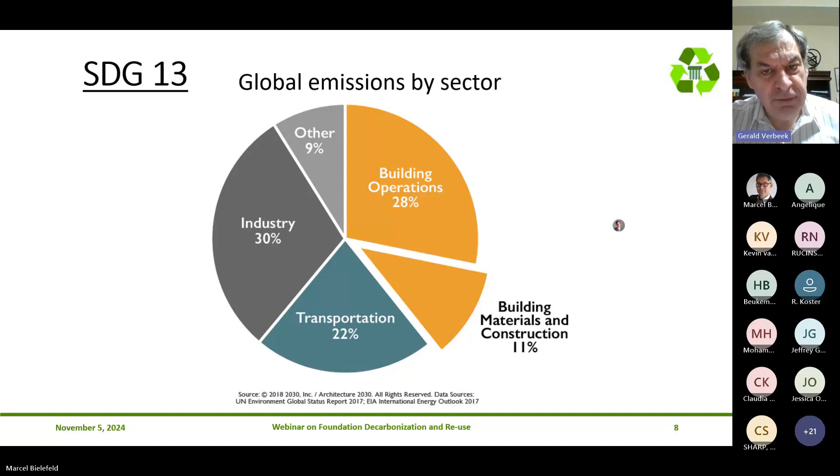But you can go one step further. When you look at just three materials - concrete, steel, and aluminum - they're responsible for about 23% of total global emissions. Those are the materials we're using, especially concrete and steel, in our foundation industry. So if we can reduce the amount of concrete and steel that we're putting into the ground, we are reducing those emissions, and it will have a major effect.

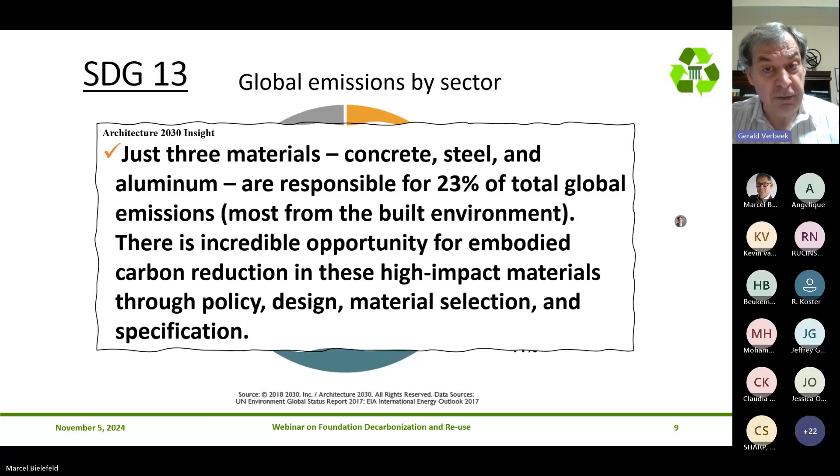And that is where this pyramid comes in. It shows at the top that ideally, to completely reduce emissions, you build nothing, but that's not really a realistic option. The least you can do, shown at the bottom, is minimize waste, because that at least reduces total emissions. But most of the time, what people think about when reducing emissions is building clever or building efficiently. Build efficiently means minimizing design loads or performing more testing so you can use higher resistance factors and reduce the size of your foundation.

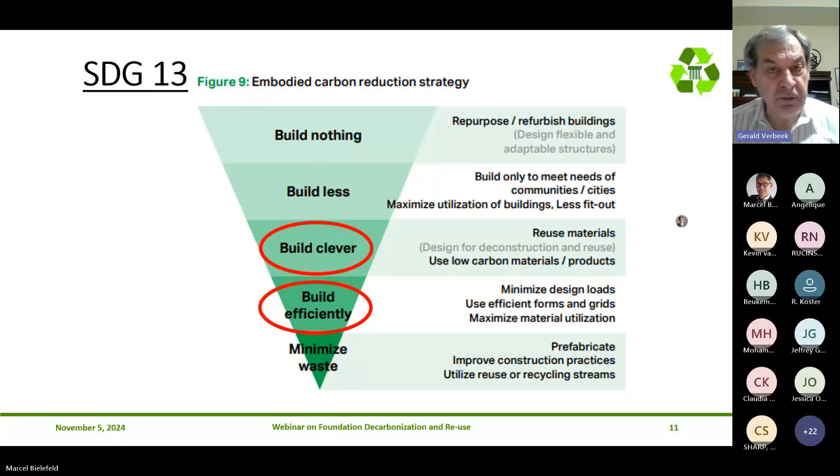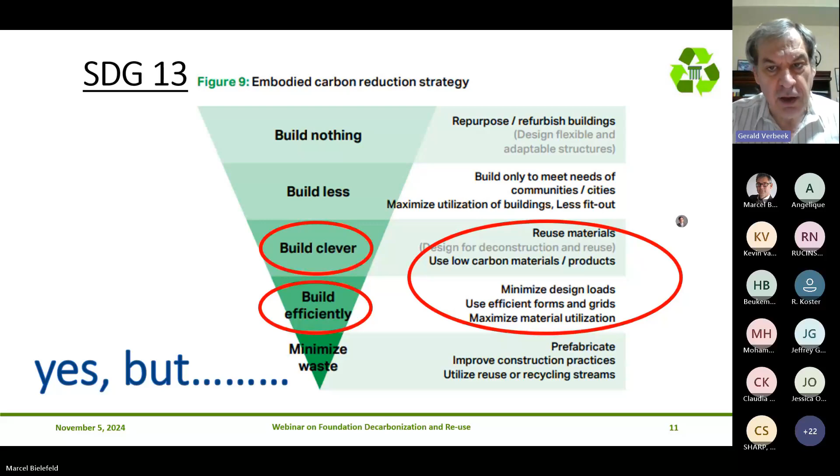Build clever means reusing materials, reusing aggregate for instance, or when putting a steel foundation in the ground, recycling steel. Those options are there, but there is another option that, in my opinion and in the opinion of the conference organizers, is not addressed often enough - and that has to do with foundation reuse. That's why back in 2023, and again this year and next year, we will continue with a conference to really focus on foundation reuse.

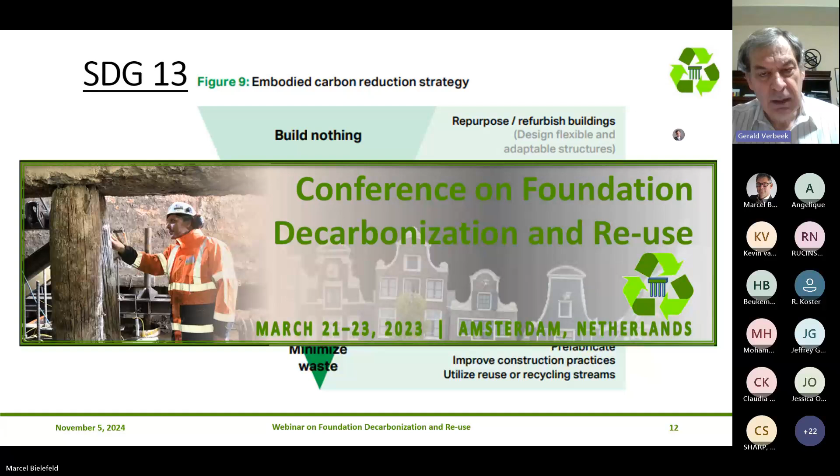The issue is that when you look at the parties involved in a foundation design, there's reluctance, a hesitancy to start talking about foundation reuse. For the geotechnical engineer, foundation reuse may require him to assess the condition and capacity of an existing foundation, something he has not designed, something he was not involved with putting into the ground.

Therefore there are definitely risks involved. For the structural engineer, it means he has to change his design, modify it based on a foundation that is there but not necessarily laid out exactly the way he or she would like. So again, not an ideal solution. The architect has the same situation. He is now bound to put together a design constrained by the existing foundations, something that may not allow for the most optimal solution he or she has in mind.

For the owner, it is very tempting to go with an existing foundation because it may save quite a bit of money, but at the same time you will have to work with a project team where most people are not very happy to go that route. And finally, the regulatory body or building authority, the people that have to approve and certify the design, have to deal with a solution that hasn't been applied all that often, and therefore there are again additional risks involved.

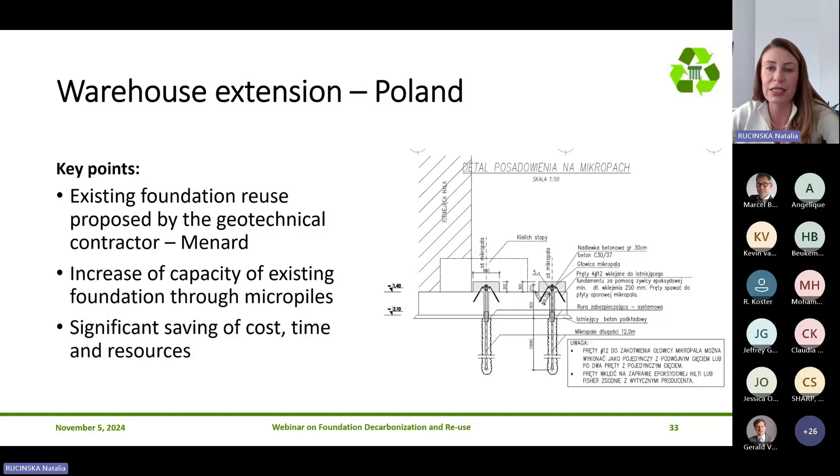That's a nice example of a small scale project, especially compared with the next one, which is a very large scale project with an interesting foundation reuse as well - the FEDRE project in France, a large wind farm development.

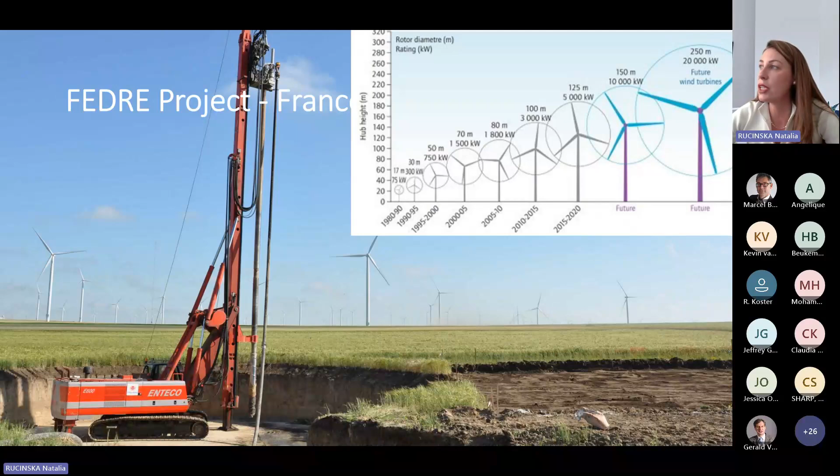If we look at the wind farm industry, it's quite interesting because wind turbines are growing in size. In the 1990s they were 30 meters high; today we're between 125 and 150 meters high, and those turbines are being replaced.

When they're replaced from the previous generation to the current one, the traditional approach is to demolish the massive foundation - generating about 900 tons of concrete waste - and put a completely new foundation under the new wind turbine. The proposal of this project, where Menard is also involved, is to strengthen instead of demolish the existing foundation, to allow the new generation wind turbine to be built directly on it.

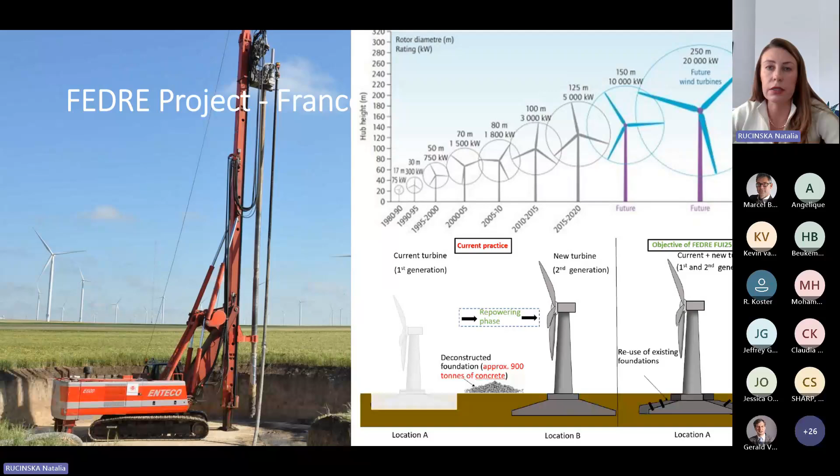A very challenging project - this approach of reusing or modifying the old foundation generates cost savings and is also good for the environment. It's quite challenging because it's a complex design case involving many different parties to make sure it's successful.

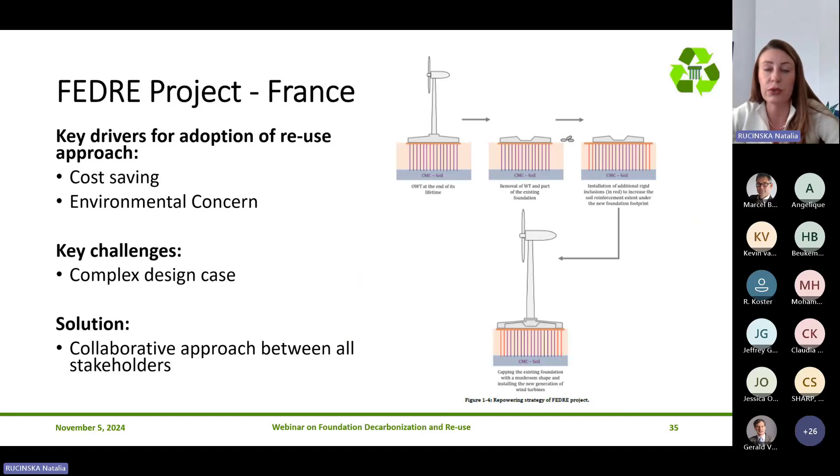Research institutes, contractors, insurance companies - everybody has to work together. I think it's important to mention that a collaborative approach between all stakeholders is generally what you need to have a successful project considering reuse.

Right, so very quickly wrapping up, looking further - what can we do to be more efficient? The definition of insanity is doing the same thing over and over again but expecting different results. Today we have concerns about reusing foundations.

How can we build so that future generations can go back to the construction we're putting in place today, and efficiently use the information and resources we provide them to reuse in the future? That's a different angle to look at it - how can what we create today be reusable in some years' time?

And where can we start? Is industry and infrastructure a better choice than commercial and residential? Probably - it's a little bit easier, more repetitive, lower loads, and less risky constructions.

Looking further from the stakeholders' point of view, what should we do to be more efficient? Authorities could set policies for future reuse aspects. Owners could think of building components as assets.

This, I think, is quite interesting - I'm an owner of land which already has some foundations in the ground. Can I make my land more attractive price-wise because it's already reinforced for future construction? Maybe that's the way we should be thinking about this aspect as well.

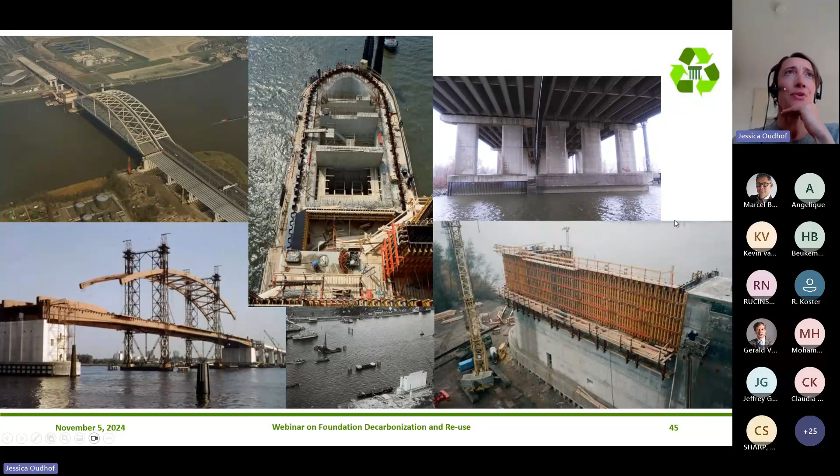But with the widening of the bridge, they took quite a bold approach in the foundation. Here we see a long section of the bridge, so the main arches, the North Pier and the South Pier supporting the arch, and there's also a bascule pier.

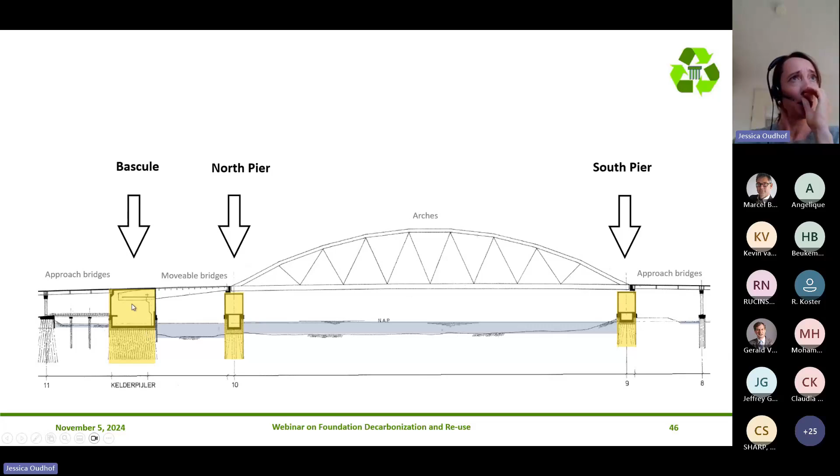But in the 80s, when they wanted to widen the bridge, here we can see the foundation. The green foundation is the old bridge. It's based on a caisson foundation. It's quite deep. It was built in the mid 60s. And then when they wanted to widen the bridge...

But because space was limited, they in the end decided to put the new West Bridge, that you see on the left, with one side on the caisson that was already there and with the other side on a new pile foundation. So they added some parts to the old caisson foundation, that's the pink parts, one to support the new arch and another to ballast the loads so the center of gravity wouldn't change too much. And then they constructed the pier on the other side on piles.

So in the cross section, the arch has 2 different foundations, and they are not connected. So of course the slab, the superstructure, is connected, but the substructure is not. There's a small dilation in between the two.

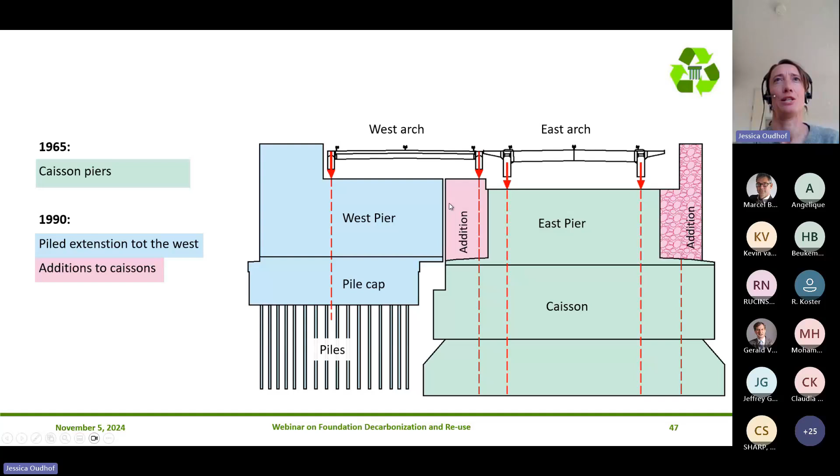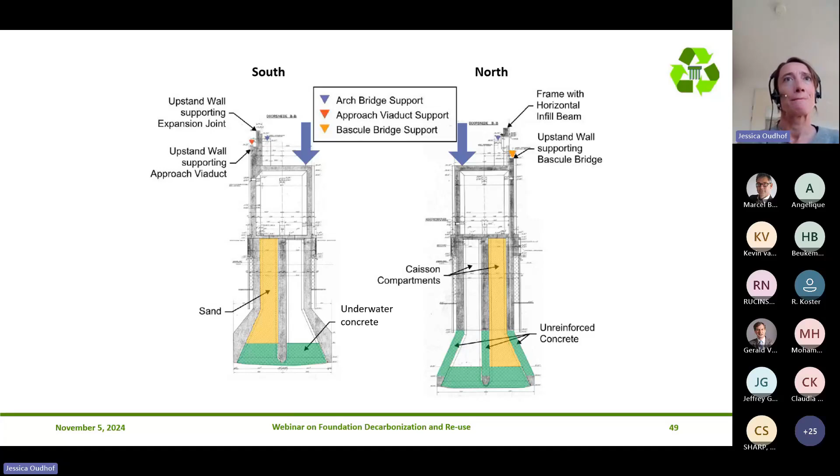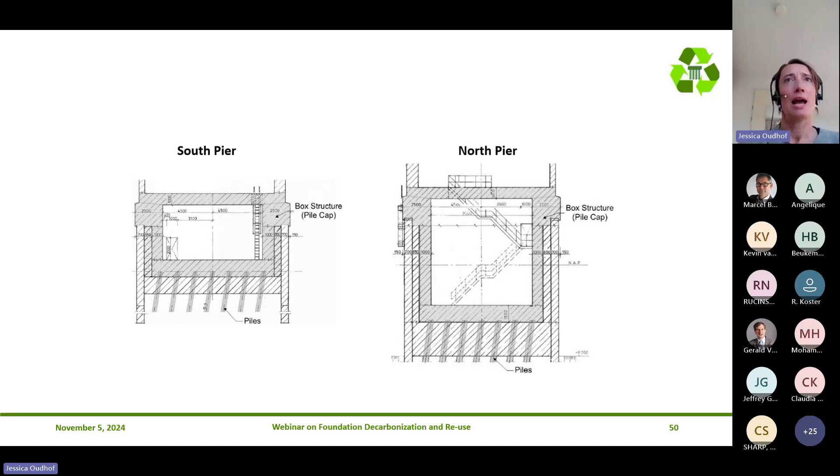A little bit more information on the piers. This is the pier from the 60s, a caisson foundation, underwater concrete, unreinforced concrete. They're ballasted on one side because the arch is leaning on the inside of the caissons. And this is the extension they built in the 80s, so it's piles, like a box pile wall with raked piles in between to also take the lateral loads, and a concrete substructure on top.

The new challenge is that the bridges need to be renovated because of the age of the bridges, but mostly because of the heavily increased frequency and loads of the traffic. The superstructure is not sufficient anymore, it needs a lot of maintenance now, and it needs to be replaced.

So the idea that has been taken is to replace the west arch by a new arch, bring that west arch that's been taken away to a yard, upgrade it so it's good again to go for 100 years, and replace the east arch with that renovated west arch.

For the substructure, that had two implications. Because the new arches and the new deck will be heavier, there's an increase of load, and also there's a slight change of the bearing locations in the cross section. So that was the task, to see whether the foundation that we have there could deal with those loads, or if changes to the foundation were needed.

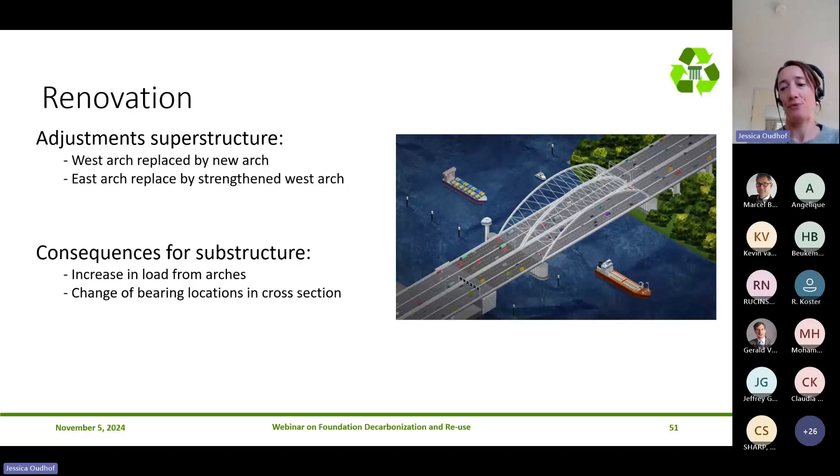I think a very good part of this project was that we had so much available information, especially from the 80s. We had 14 boxes with documents, letters, drawings, as-built information. It was really, really good. So we had a very good idea of how the design was thought through. All the design calculations were there, all the design drawings were there, but also a lot of as-built drawings were there. So we had a very good idea of what was actually there.

We had the ground investigation that was done both for the bridge that was built in the 60s and the widening in the 80s. And we also had monitoring data since the 60s. On average, about every 4 years, this bridge is monitored in XYZ direction. And during the widening, the monitoring frequency had intensified. So from that data, we could see whether the foundation was behaving as we would expect it to behave.

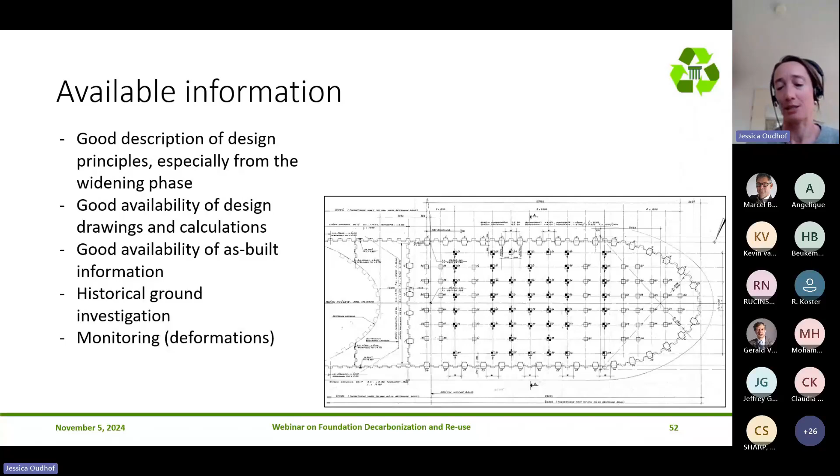Apart from the information that was already available, we also did new investigations. So we did ground investigations, CPTs. It was a bit difficult because there was a lot of scour protection, and sometimes it was difficult to get through. We did groundwater and open water chemical testing to see what the quality of the groundwater and the open water was. We did structural investigations mostly to the concrete, inspections and testing.

Now here we've listed all the tests that were done. But because of the nature of the structure and the depth of the structure, there were a few things that we couldn't or didn't investigate. That's the condition of the precast pre-stressed piles, the concrete piles, and the underwater concrete. These were both at such a depth and so impossible to reach that it was decided not to investigate those further.

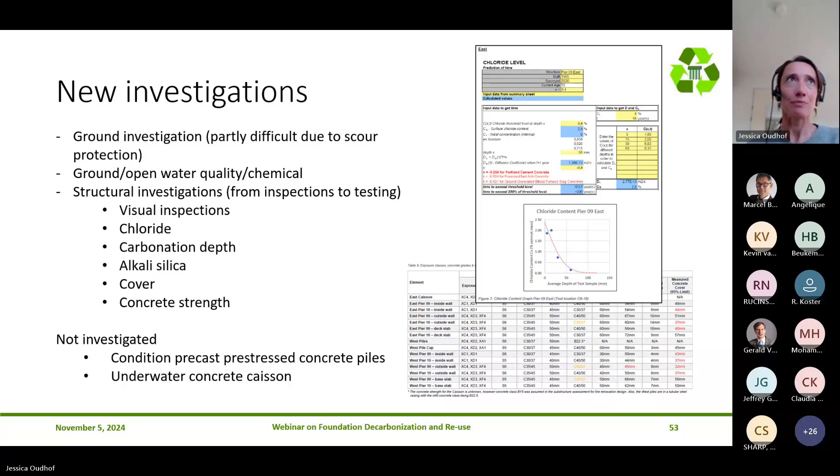When all the data was analyzed, the old data and new data, the first thing we noticed was that the differential settlement between the pile foundation and the caisson foundation was almost negligible. It was between 1 and 2 centimeters, so very, very small. The deformation itself also showed that the structure was behaving well, so there were no anomalies. The general condition of the piers was good. There were some small defects, but nothing that couldn't be repaired or maintained.

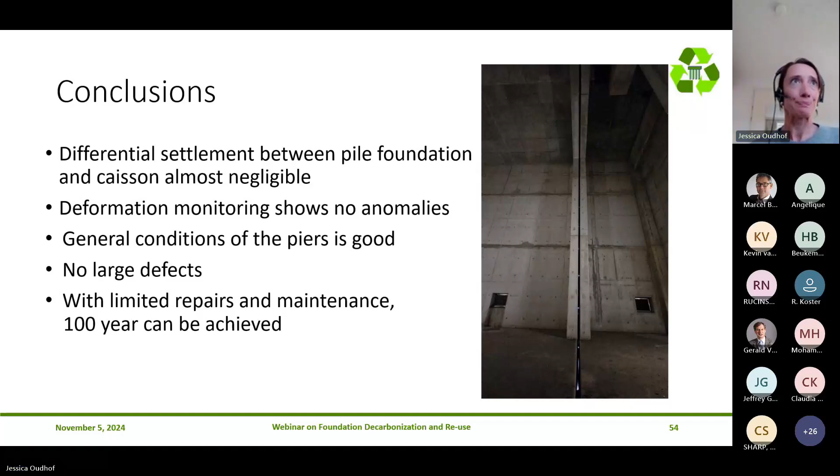And the idea was that if we did these repairs and maintenance, we could achieve 100 years lifetime. So then we had to look at the load increase. Could the foundation take the load increase? Although the load increase was quite high at the bearings, because the new structure is quite a bit heavier and the traffic is heavier and wind loads are heavier, everything is heavier, because the foundation itself is so heavy, these caissons and pile caps and things, the load increase at the actual foundation level, the geotechnical loads, the increase was relatively small, between 5 and 10%.

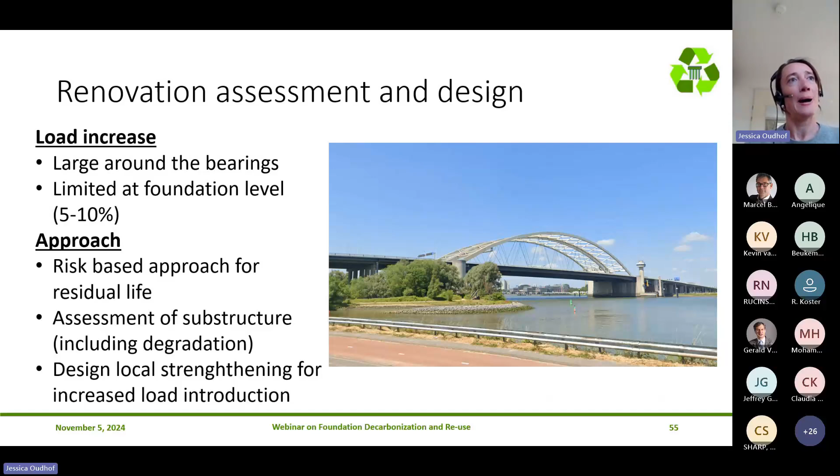So we took an assessment of the substructure, and what we found was for the pile foundation, it did work, but we needed to redistribute the load a little bit more between the piles. So we did nonlinear springs, a nonlinear soil structure interaction calculation. So it could work from a total point of view, but we needed to strengthen the pile cap to make that redistribution possible.

Also, there's another aspect to this specifically for the Netherlands. In 2016, based upon research, the pile factors that determine your pile bearing capacity were significantly reduced in the Netherlands. There is a code though in the Netherlands about the reuse of foundations of existing structures, and if your load increase is less than 10%, you can use those old factors. So that's the approach we took, but we also did a sensitivity calculation with the reduced pile factors, and then your factor goes from 1 to 0.7. So it could lead up to a decrease of bearing capacity of 30%.

That all worked. So we designed the reinforcement of the pile cap.

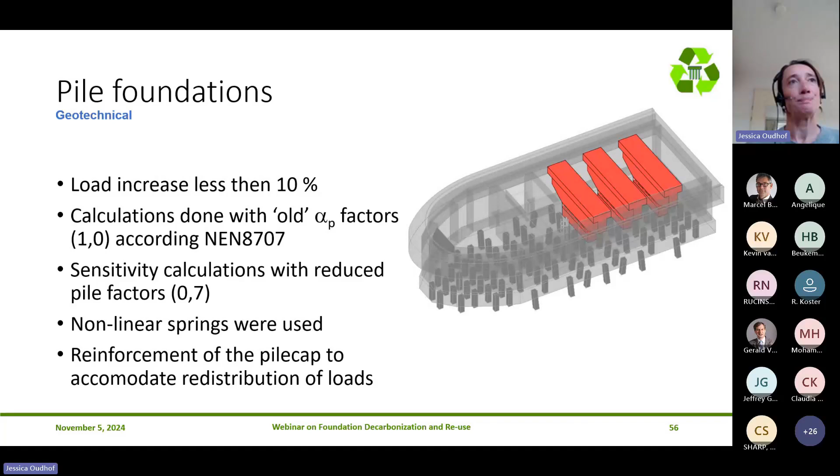For the caisson, we did undrained and drained checks for the geotechnical bearing capacity. We did analytical calculations, and 2D and 3D Plaxis calculations. So bearing capacity stability was all good.

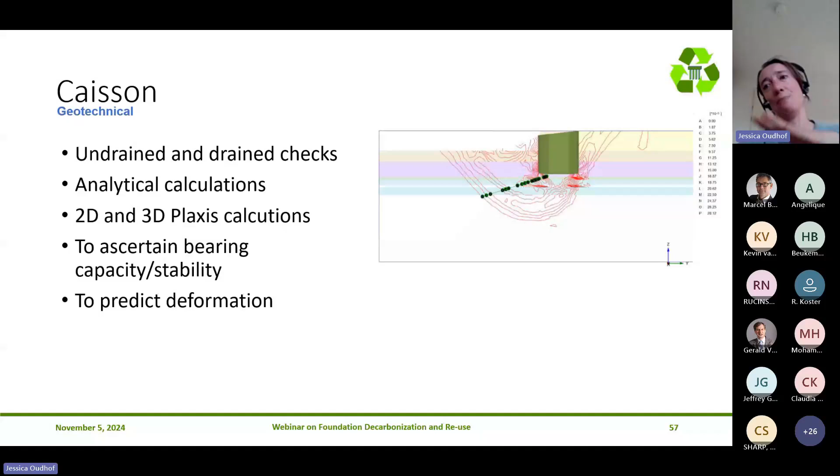We also did some calculations to determine the deformations expected while lifting off the bridge and replacing it with the new bridge. We did checks for the pile foundation, structural checks.

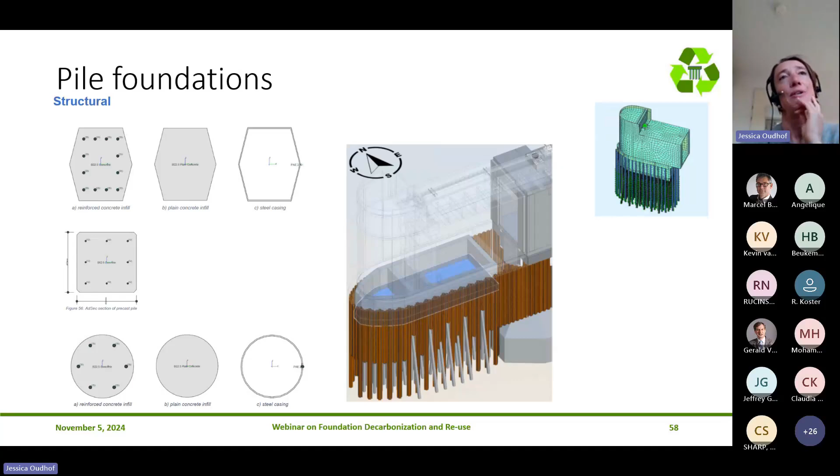What you often see is that the structural checks are even more complicated or more difficult than the geotechnical ones, because the soil generally doesn't tend to deteriorate over time, but structural materials do. What was good here is that most of the piles had a steel casing, so we could consider that sacrificial and just calculate with the concrete and the reinforcement. So those were all checked as well.

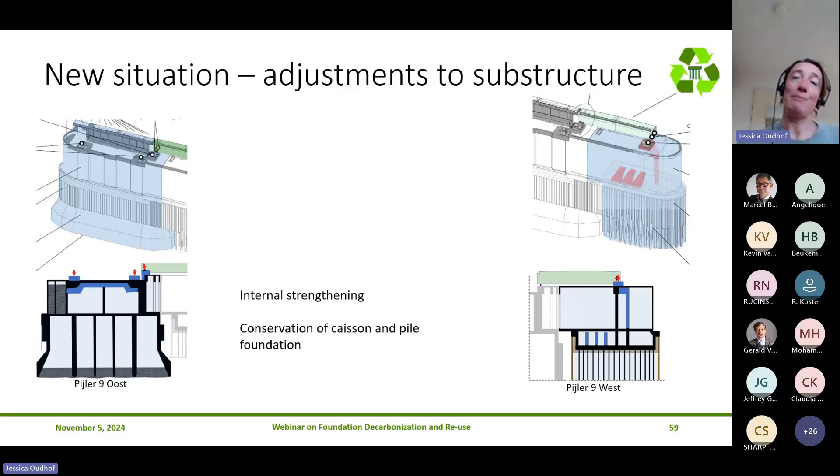The conclusion was that we can reuse the foundation as it is, with structural strengthening of the pile cap, but that's relatively easy to do. And then we can keep the foundation as is. Thank you.

Thank you, Jessica, for an interesting presentation. Unfortunately, though, I understand that the project is on hold, so right now it's only studies. Do you think that it actually will be implemented, or are we having a situation that possibly we have to redo all these investigations again for yet a new design in the future when the project finally does go through?

I think it will mostly be that what we've done will be reused, and I don't think there will be a solution where there's no foundation reuse, because foundation reuse is almost unavoidable. If you have to rebuild this foundation, it's a hindrance and it's going to be incredible. So I think whichever way the project goes, we'll still keep the foundation reuse. We will keep it, yeah.

Yeah, which is then again a good link to what Natalia was saying in her presentation. Natalia, if you could also turn on your camera. Natalia was emphasizing that in some places there is simply no space, and that's not only in Western Europe. She mentioned cities, and this example, of course, we're in the water. But here in North America, when you talk about New York, San Francisco, Chicago, there's simply no more space. Over time, buildings have been replaced, they put in additional foundation or new foundation, and now the whole area is basically full of foundations.